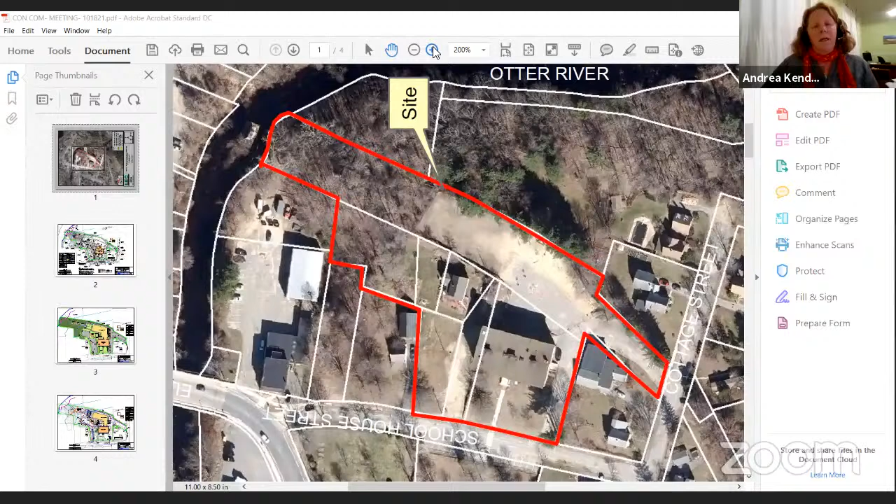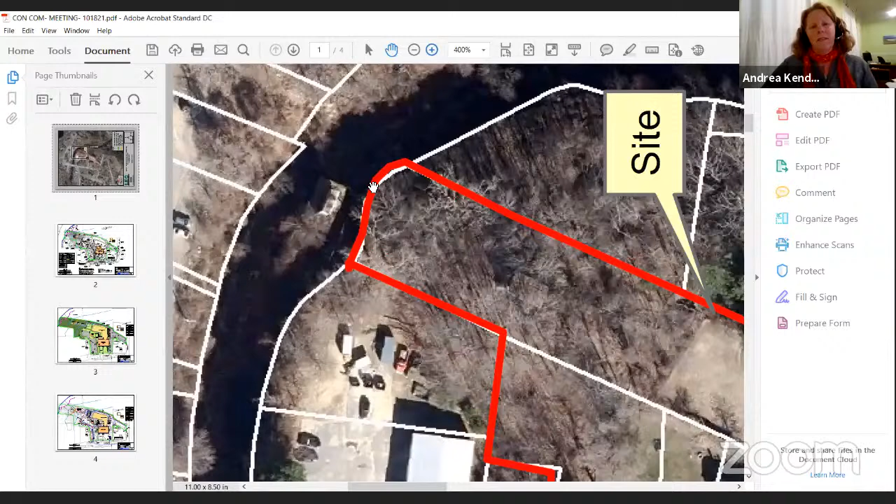So I'm going to zoom in a little bit for people to get more acquainted, if you haven't been out to the site before. This is the former railroad alignment, and there is some existing infrastructure associated with that. This is a former bridge platform of a concrete bridge abutment, and in the river here is another bridge abutment.

In terms of orientation, as I mentioned, we have the existing residential house and driveway, lawn, and then to the north of the site, some of the forested areas. The Otter River is the main hydrologic feature associated with the site, and there is a wetland that borders that river. All of this is located at the bottom of the embankment, so there is quite a topographic difference between the site, which is level, and then it transitions and descends topographically down to the Otter River.

By way of background, this river is not considered a cold water fishery. There's no natural heritage mapping of the site for any estimated habitat or other, and there are no vernal pools associated with the site. We have the 100-foot buffer zone that extends just a little bit onto the project site, and then we have the 200-foot riverfront area, which I'll show on the next screen, that encroaches onto the site just a very little bit.

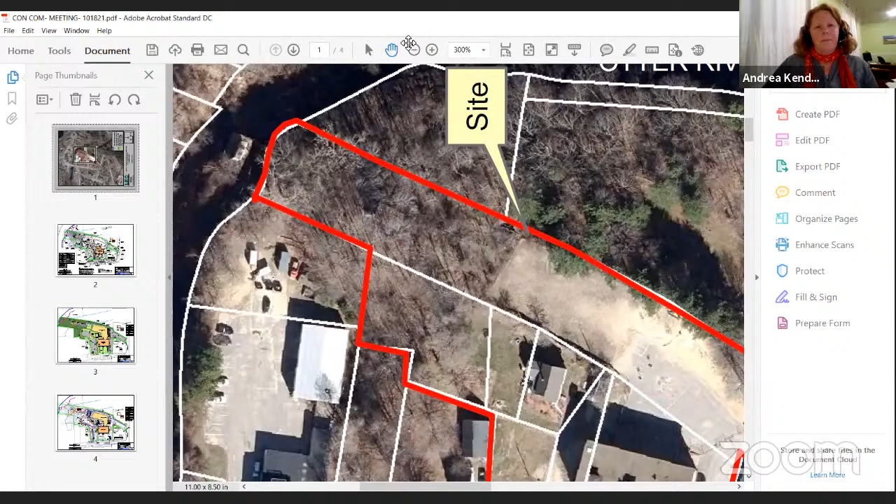In terms of... I'll zoom out a little bit. Here we'll be able to see a little bit more detail of the former railroad alignment and that concrete platform that we could pick up a little bit in the aerial.

The bank and mean annual high water associated with the river here is in dark blue. The bordering vegetated wetland is in magenta, and that again is pretty much topographically confined to the lower lying areas of the site.

And then the site ascends. We have the 100-foot buffer zone in orange, and then the 200-foot riverfront area in light blue, and that extends onto the existing lawn area, encompassing the former railroad alignment. So for the vast majority, the site is not located within jurisdictional resource areas or associated buffer zones.

I thought it would be helpful to convey that there really is minimal stormwater management at the site. Runoff from the rooftop is collected and conveyed and discharged into the drainage system in School Street, and it more than likely, from what we could tell, goes straight down to the river. There are a couple of catch basins, maybe 3 catch basins, that capture some of the runoff from the paved driveway closest to Cottage Street. But otherwise, everything either sheet flows into the School Street drainage system or sheet flows onto existing lawn areas or off to the sides into the forested areas.

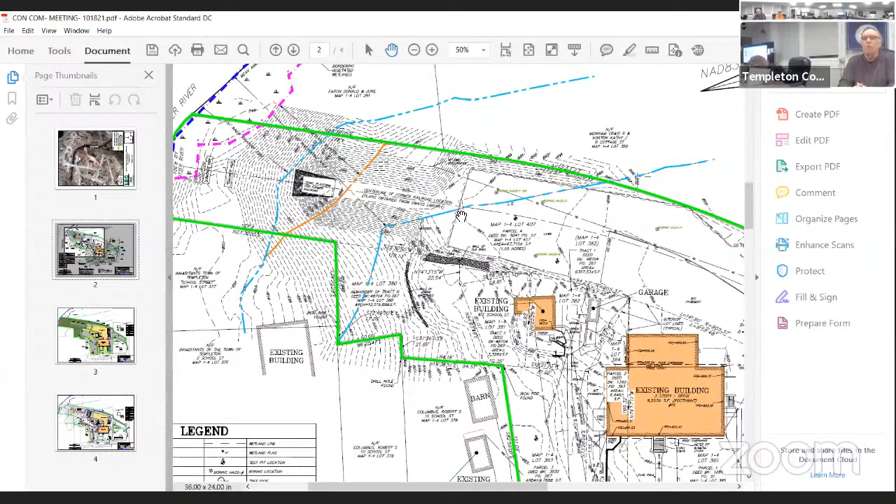Okay, great. And then just as a reminder, the light blue is the 200-foot riverfront area. So again, just a portion of that former schoolyard, the lawn, there is a chain link fence, and then the railroad is within the 200-foot riverfront area and that platform. Thank you.

Any other questions? Okay, no more questions. Great, thanks. So in terms of the proposed conditions, here's a color plan that describes and depicts what is currently proposed.

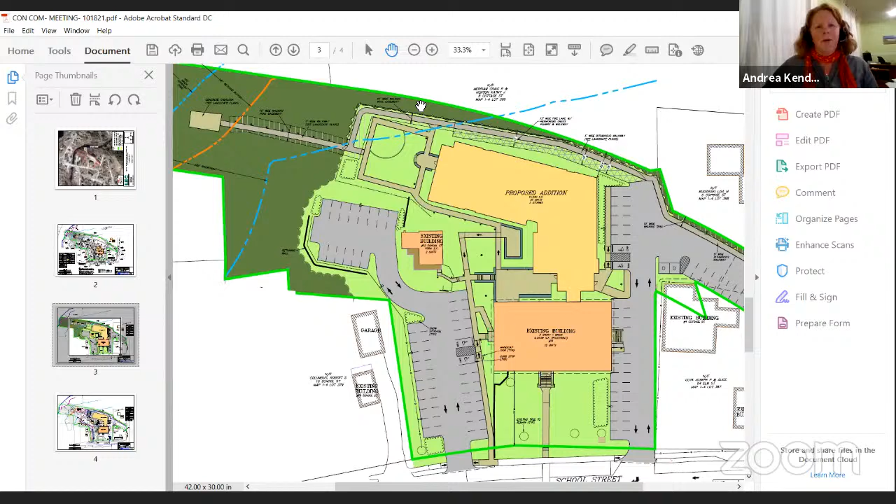As Matt described, the existing school building will be converted into apartments. There is a building addition, I think about 11,000 square feet, that will be added to the rear of it. The existing single-family house will also be converted into housing. The garage, I believe, is being removed.

Other programmatic aspects include making this current access way from Cottage Street into the site, then exiting out to School Street, a two-way route. School Street is going to be utilized as a two-way road as well, converted from one-way.

And there's going to be two or three main areas of parking on the site, plus school parking off the site. There will be parking opportunities along the entrance and along this driveway route, and additional parking on the north side of the building, extending up into the northern portion of the site.

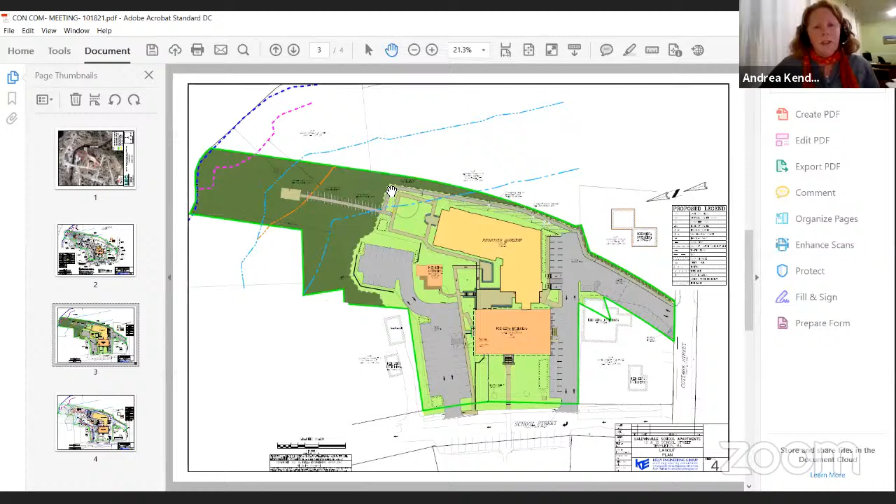Actually, none, except for any vegetation that might have overgrown onto the embankment on top of the former railroad embankment—oftentimes you'll get some saplings or whatnot growing. We're staying, at least within the school property portion, within the existing footprint of the existing development. I'm going to zoom into the existing conditions, so bear with me.

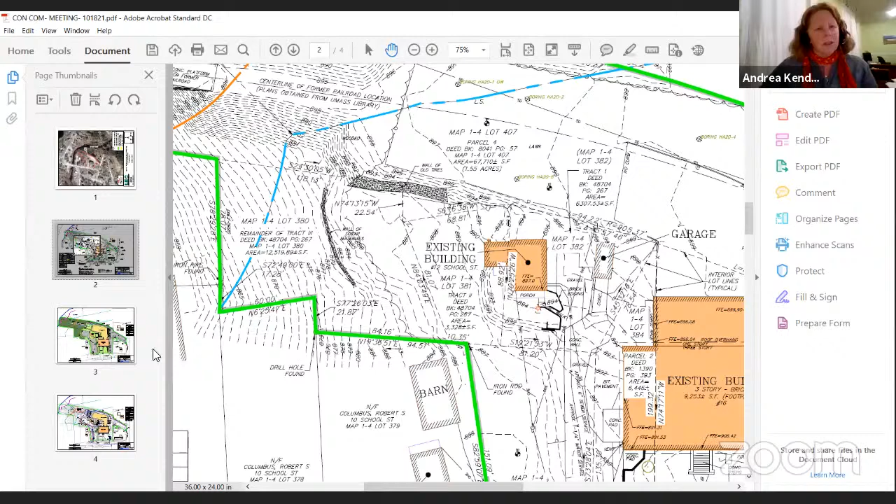I wanted to show you the tree line here. I don't know if this barn on the Columbus property shows up, but the tree line is pretty much here. I'm going to see if I can get my cursor to the proposed conditions—sorry for my zooming.

There is a little bit of clearing, but it's not that much, and all of that is outside the riverfront area. I'm sure we can get you a number on square footage—I don't have that with me now, but comparatively it's not that much as it compares to the proposed project. Brandon, I don't know if you know that number offhand, or can convey whether I'm speaking correctly about this, but that's my basic assessment.

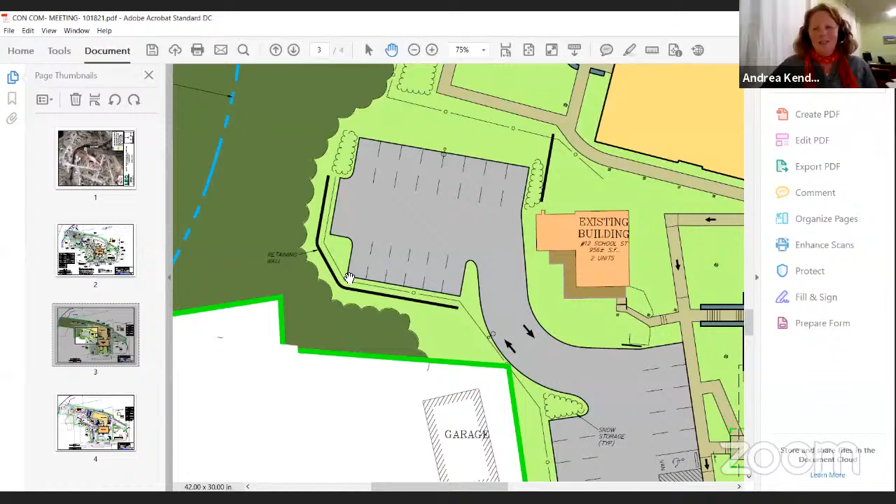Yeah, I think that's correct. This parking area is located within the existing lawn area, so there'll be minimal tree clearing. Did that answer your question?

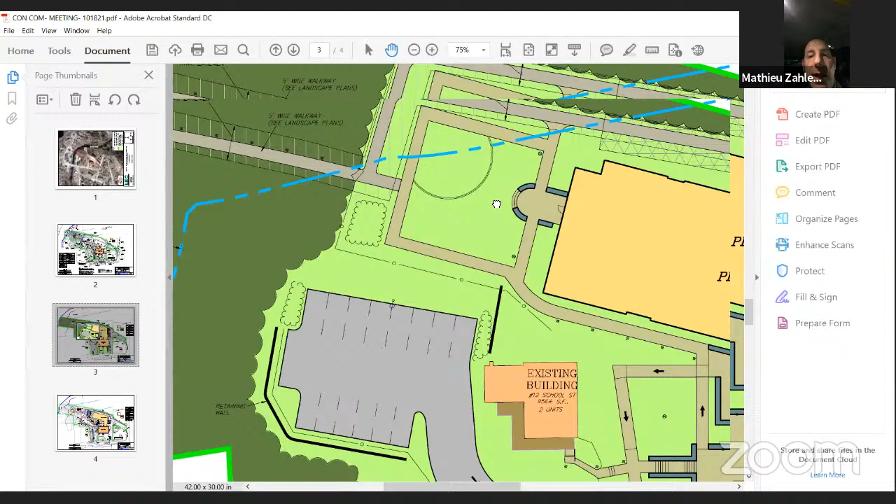I just want to add one area, Andrea, just so the commission's aware—up at the top of the site, where you come off Cottage Street into the drive and where the public access path is, actually a little further up, just by the building, right where the fire truck path stops, that little corner where there's the angle of the path. There is some tree clearing that will take place there and a little bit of grading to get the path to be level. I just wanted to point that out.

The commission could see that when we go for a site walk—that could certainly be pointed out. Thank you.

I will say one more thing: in these types of projects, we always try to keep as many mature trees as possible. They help enhance the site and the development overall, so we look to retain as much existing tree cover as possible. We'll have our arborist evaluate the on-site trees just to make sure there's no disease or any issue with them.

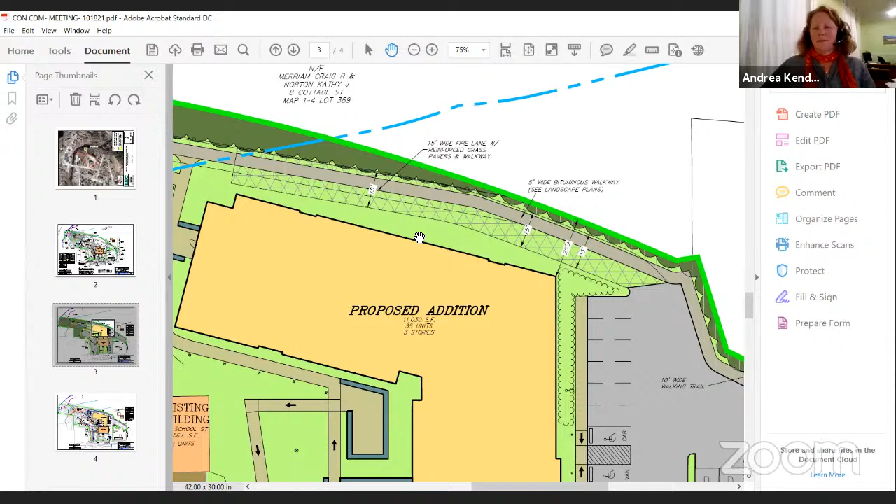Any other questions from the commission? Okay, great.

I'll describe a little bit of the stormwater management and some of the other utility connections proposed to support the development. The rooftop runoff is going to be collected and directed into a subsurface discharge unit. We've got 3 main subsurface units peppered throughout the site.

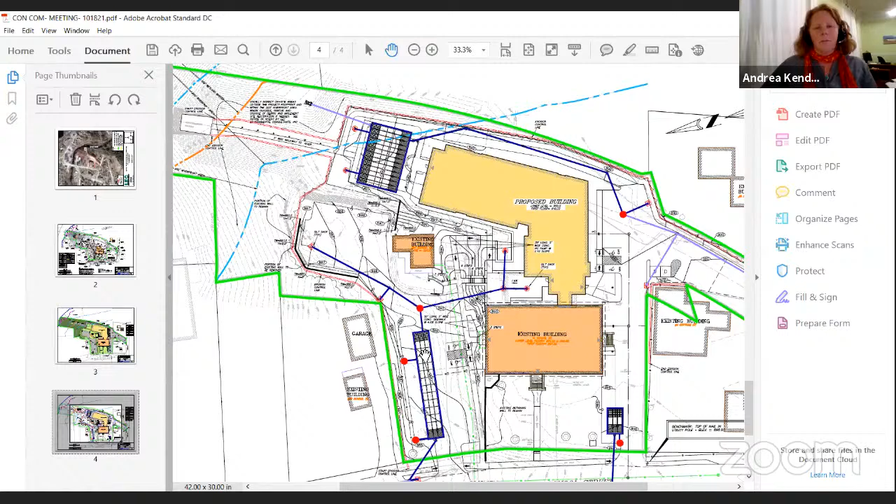One of them is below the proposed recreation area. One is proposed to the north, or on this plan to the left of the existing school building. And one is proposed at the bottom of the proposed driveway loop area. Runoff from the parking lots will be collected in catch basins, conveyed to water quality units, and then directed to the subsurface infiltration units. Any overflow from that will be directed into the School Street drainage system, for areas tributary to and within the subwater catchment area for School Street.

Runoff from the proposed buildings and driveway will be collected in catch basins and directed into water quality inlets and then into infiltration units. Any overflow that doesn't infiltrate will be piped to the existing outlet point, which will be upgraded with an energy dissipator comprised of a riprap apron at the end.

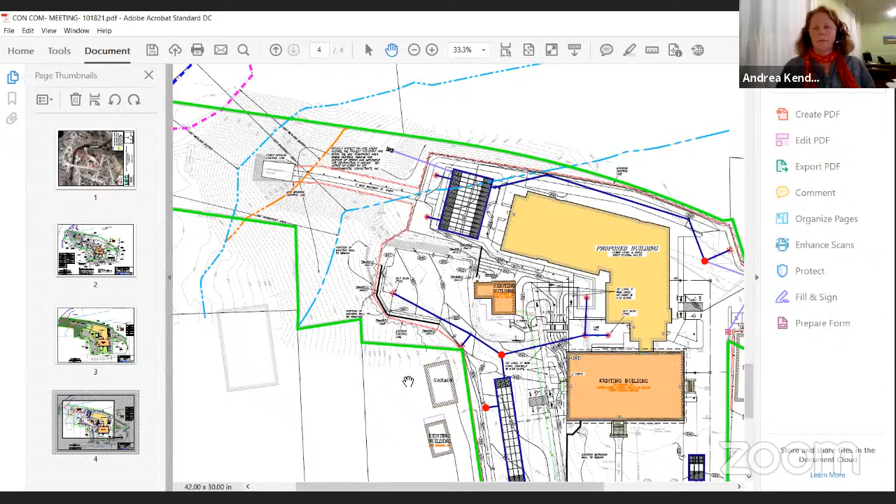We can conditionally approve it. Yeah, we can approve it. So I make a motion to approve the NOI for 12 and 16 School Street while we wait for the DEP number to be issued.

Okay, let me second it. Motion has been made and accepted and seconded. Can I get a motion to accept? Amanda? Aye. David? Yes. Myself, yes. Okay, I guess we're all set.

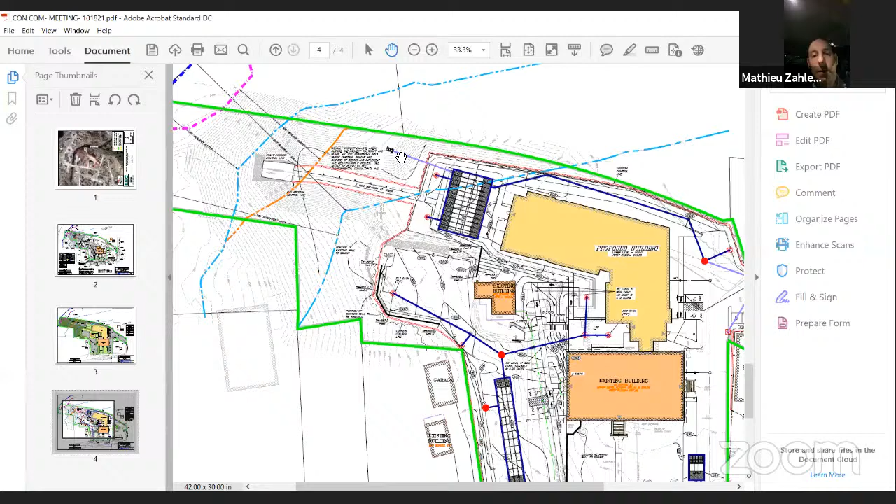Now we'll go back on to our business. I will open up review for proposed drainage work at the intersection of North Main Street, Otter Road, and Lord Road. Bob, will you want to come up and talk? It is now 6:47. We'll open up this meeting.